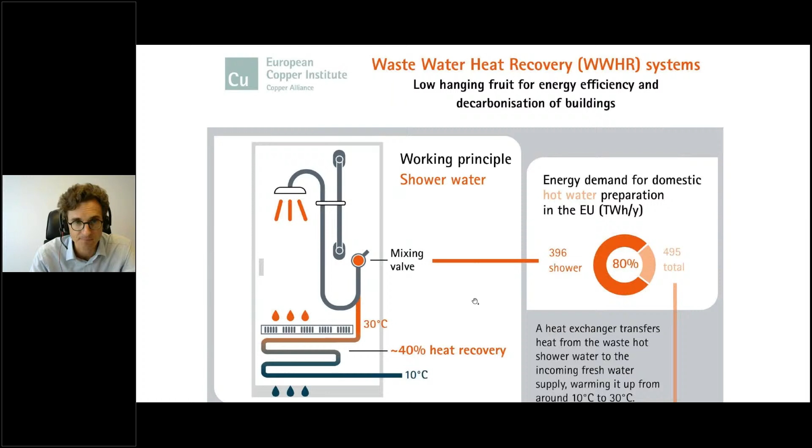My second example is related to electrical installations. When you transport electricity, there are losses that can be minimized by choosing the optimal section of the conductor, but also by optimizing the installation location, load management, control and monitoring. Today, 2% of the electricity generated in the EU is lost within in-building electrical installations. 2%, that's quite a lot. And it's estimated these losses could be divided by 2 with optimal dimensioning of the electrical installation.

Again, improving the efficiency requires modeling it. These two examples illustrate our need for building performance assessment methods that are sufficiently close to reality, holistic, transparent, applied consistently, and based on robust data. And now I'm looking forward to our discussion on this topic. Thank you.

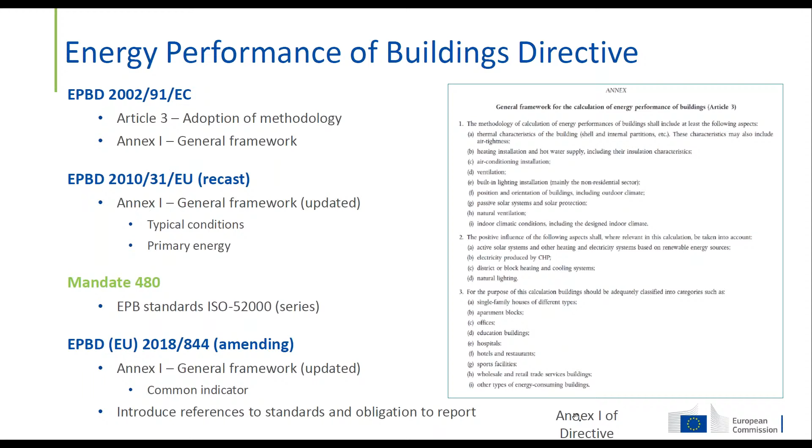In 2010, when we revised the EPBD, we expanded this general framework a little bit. We introduced further references to the fact that we had to account for typical conditions, because, as most of you will know, we design a building according to the design conditions, but we also need to make absolutely sure that the building will be able to correspond to multiple scenarios.

And also in 2010, we started the mandate M/480, which was a mandate to ISO to start developing a set of standards on the energy performance calculation of buildings. This set of standards was designed and made on purpose to support the application of the EPBD. In 2018, we further amended the EPBD.

There wasn't very much introduced in this case. We basically introduced a common indicator, which is in primary energy kilowatt hours per square meter, and we also introduced a number of references to the standards and an obligation for member states to report. So we speak with member states with a common language.

In 2021, with the current proposal for a recast, these are the elements that we're discussing today with the member states and parliament. We also propose a number of changes on the methodology. You can see now that this is in the image, some snapshots of Annex 1.

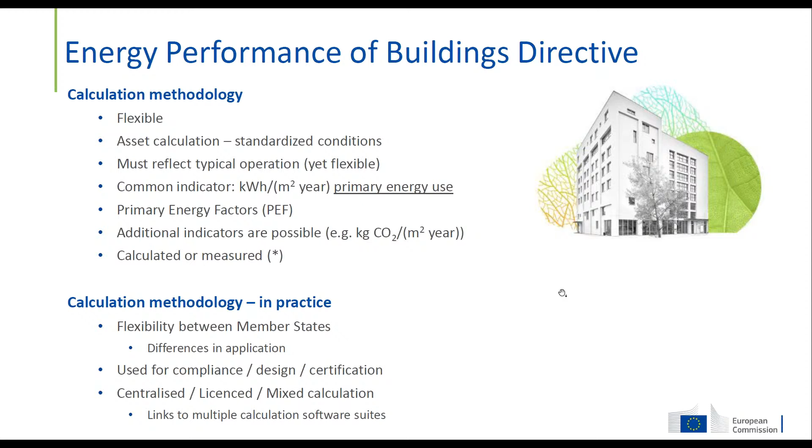And this is already my last one. The last element that I wanted to highlight is—I mentioned it briefly before—in 2010 with the EPBD, we also issued a mandate for the development of standards for the calculation of energy performance of buildings. A number of elements were very clear in the development of these standards. First of all, we needed to have this flexibility that I mentioned certain times.

In order to do that, the standards have been developed in a modular approach. You can adopt all of the standards, or part of them—you can pick and choose whatever is useful for you. In terms of obligations, member states are not obliged to use the standards; there is no obligation to adopt them.

However, there is an obligation to report the calculation methodologies in member states using the language of those standards, using the templates developed on those standards. This allows us to have a common understanding of what the different methodologies can do, and also allows us to compare the different calculation methodologies.

There are a number of standards that are directly identified in the EPBD, for example, all the overarching standards, but also the indoor requirements and the primary energy factors standards. In addition to setting up this set of standards, we've also supported the development of a support service.

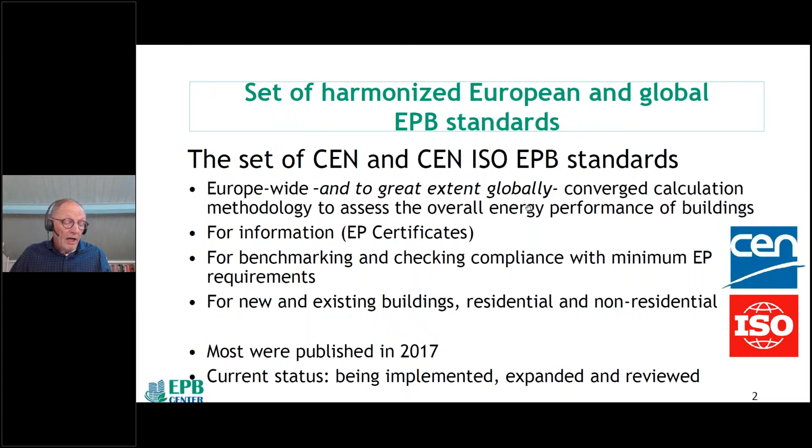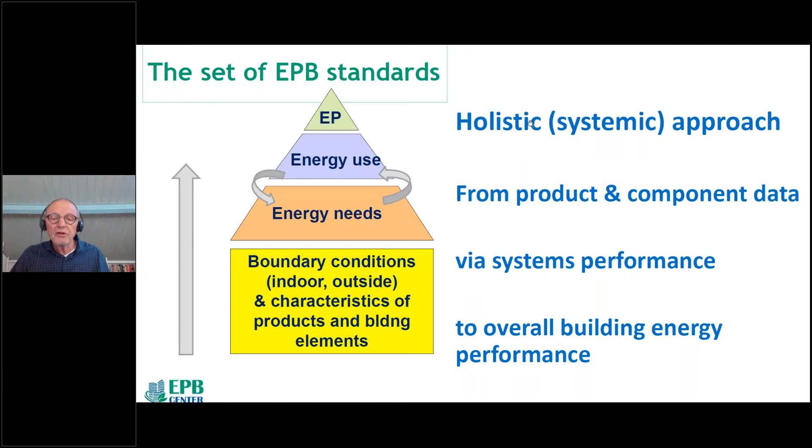So the set follows a holistic, systemic approach, starting from the product and component data via the energy needs and the system performance to the overall building energy performance.

And as also already mentioned by Pau, the modular approach has been adopted, which means that you have a subdivision into overarching standards, standards on heating and cooling system, domestic hot water, ventilation, lighting, building automation and control, and on building and building components. Here you see the numbers of sub-modules in these sets, which indeed makes it quite flexible to adopt the whole set or to start with a number of the standards, and where needed to have hopefully temporarily national standards to fill in some gaps if there are.

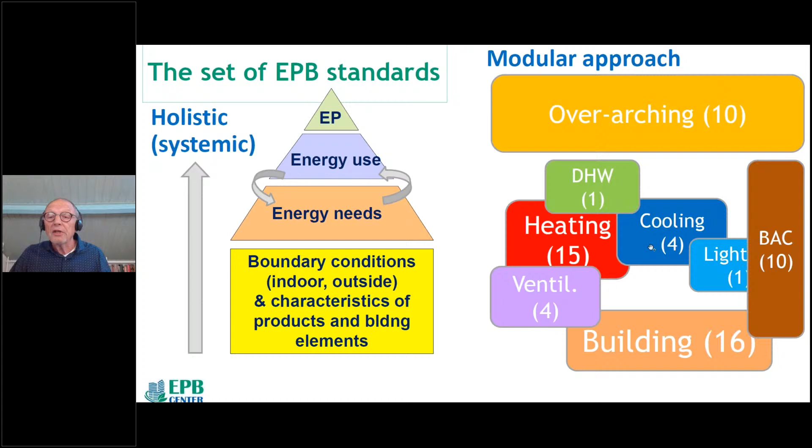So why is it important to have and to use this set? If you look at the energy performance calculation methodology, it's not only the calculation method itself, it also concerns common definitions. So for instance, the definition of primary energy, definition and specification of the floor area. If you speak about square meters, kilowatt hours per square meter, it's very vital that you know which square meters you are talking about. And also the assumed outdoor and indoor conditions, so the climatic data, of course, and the temperature settings, ventilation requirements, lighting requirements, depending on the function of the building.

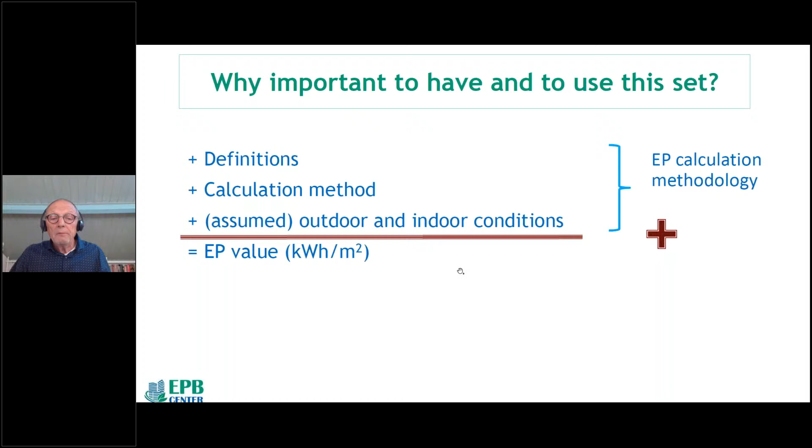And that altogether gives you an energy performance value in kilowatt hours per square meter, if we look at the primary energy. But then the question is, what does it mean? It doesn't mean actually anything if you have just a value and you have no benchmarks to compare with. If you have a meter, you have to know what is the 0, what is the 100 centimeters, and then you have a benchmark. So you need benchmarks, reference values to give a meaning to the energy performance value, and only then you have a metric.

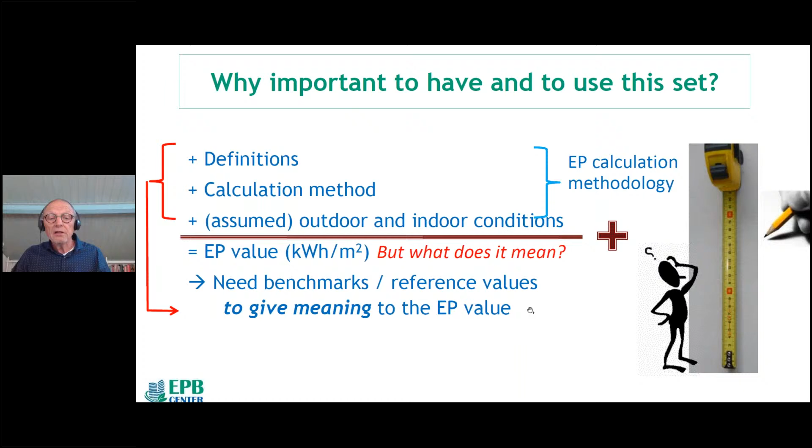So the set of EPB standards is a common energy performance assessment methodology consisting of definitions, actual calculation methods, sets of assumed outdoor and indoor conditions, and energy performance indicators. And if one of these is different, you have a different methodology, you have different output and a different meaning.

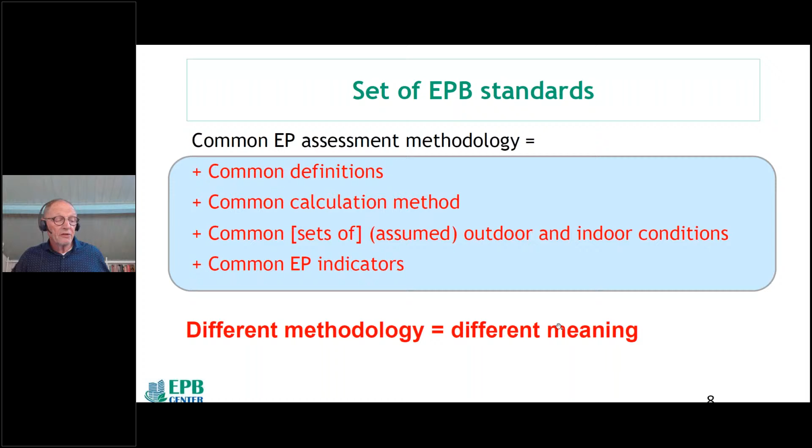Is it a one-size-fits-all approach? No, as already stressed, you need to be flexible to allow national choices, for instance for climatic conditions and primary energy factor values, which reflect national infrastructure. But if you want a common metric and comparison between countries, you should aim for the possibility to converge to a common reference.

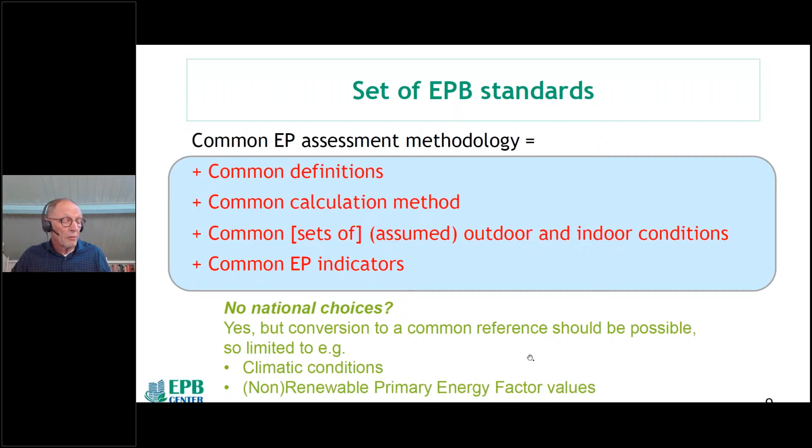The time today is very short, there's a lot more to say, but luckily we have the EPB Center website where you can find a lot of information, and you can also ask questions there. We have a large amount of information on the set of standards, individual standards, frequently asked questions, webinar recordings, short videos, recently updated tools. Very new is a number of detailed case studies on individual standards and on the overall energy performance calculation, and this is still growing.

I could also introduce a number of key EPB standards, but there's no time to go into depth on this slide. So what I will do is upload this slide with dynamic links from each of these blocks to more information on all of these key standards, and put it on the website for you to look at.

Just one thing I want to highlight is that you see in many places EN ISO 52000 appearing, so 52000 to 52120 and more. These are the EN ISO 52000 family of standards. When they are upgraded from CEN standards to the global level, they become part of this family of standards.

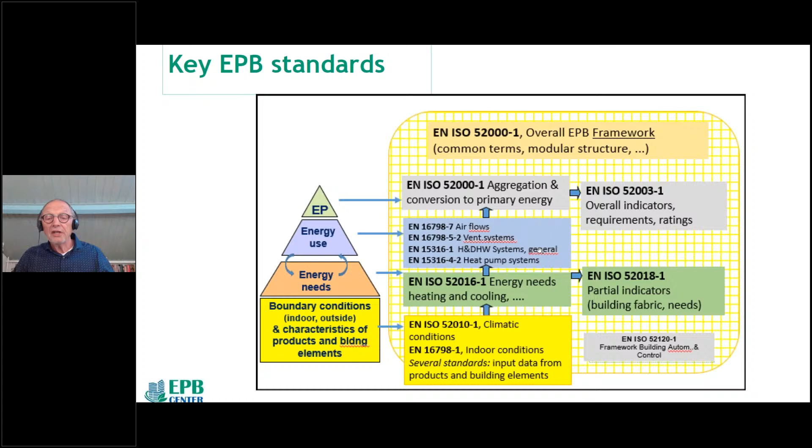Now something about the future development of the set of EPB standards. As we speak, there is a systematic review going on of all the EPB standards that were published five years ago, in both CEN and ISO.

For this unique occasion, a team of CEN and ISO experts prepared and distributed an informal guidance document which contains extensive background information, but also food for thought and questions for all the relevant mirror committees of the national CEN and ISO member bodies, to provide feedback on individual standards and on the whole set. And of course, this information and these questions are also of interest to other stakeholders.

This information can also be downloaded from the EPB Center website. And if you as a stakeholder have interest in filling in the questions, you can submit the response to the EPB Center via the website, or directly to experts if you have their email addresses.

If you ask what I see as a priority for the future, maybe a little teasing what Pau said, I would like to see less options for national choice to establish increased convergence. And also digitalization of the standards. There's an ISO Smart program aiming for more digitized standards in the future. The program is not very clear yet, so we hope to have a fruitful discussion and pilot projects in this program to help the digitalization of standards.

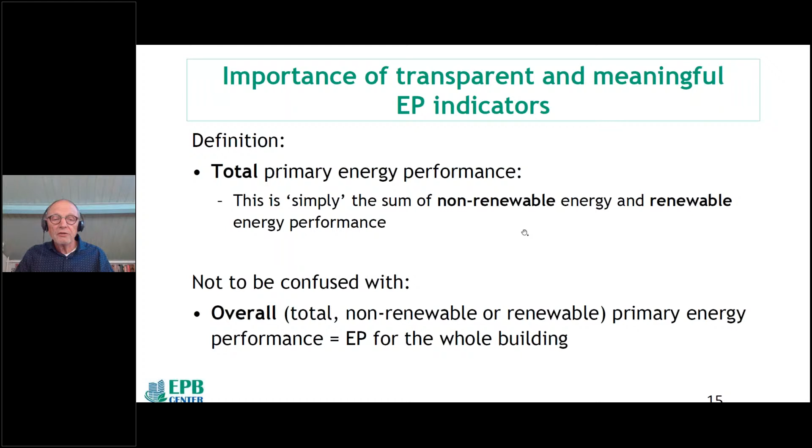Otherwise we are not clear, and we're speaking about different things.

Another important aspect for calculations and definitions, particularly relevant for renewable energy produced and used on site like PV panels, is the concept of net annual energy performance, in which the energy balance is averaged over a longer period, in this case a year. So the need for electricity from the grid during the evening or wintertime is then compensated in the calculation by the surplus of PV during the day or during summer.

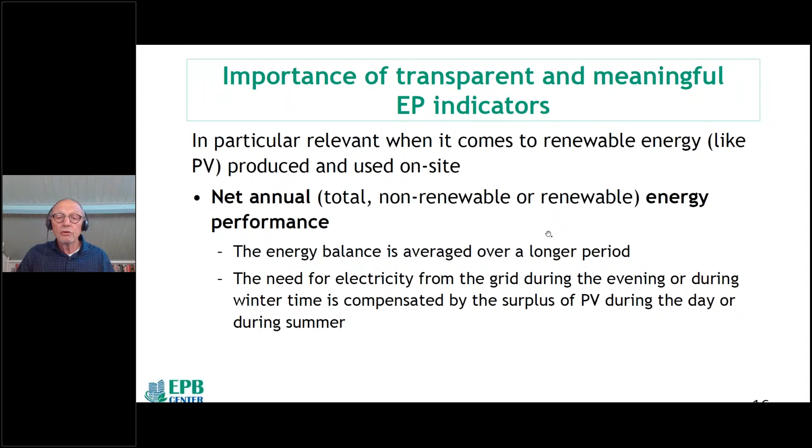This might have been a fair approach for nearly zero energy buildings, but when we want to move toward truly zero emission buildings, this is no longer the case.

Summer or day surplus does not cover the winter or night shortage. It's only compensated in the calculation, which disguises that non-renewable energy is actually being used. So if this is the route towards zero emission buildings, it's a fake zero emission building. It's not covering, but actually covering up the use of non-renewable energy. It also hinders the optimization of the energy balance between the building and the grid, for instance hindering the appreciation of the smart use of equipment and batteries.

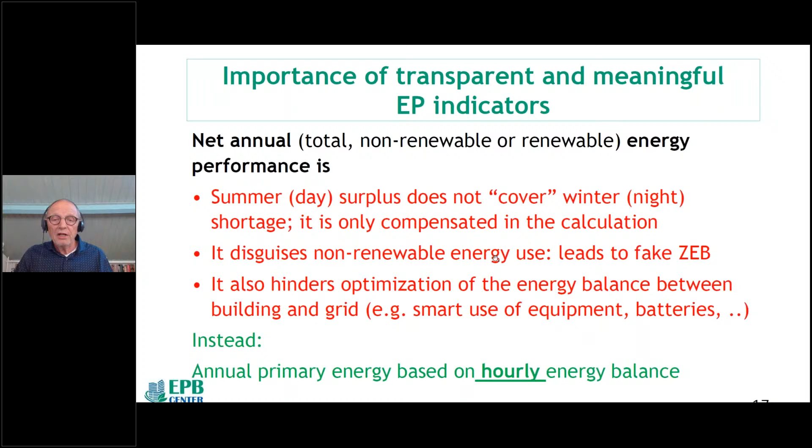Instead, we should aim for annual primary energy based on an hourly energy balance calculation. I'm happy to see this is also the route followed in the EPBD proposal by the European Commission. I can show many illustrations of this in the case studies on the EPB Center website, where you'll find those. There's an absolute need for hourly calculation steps.

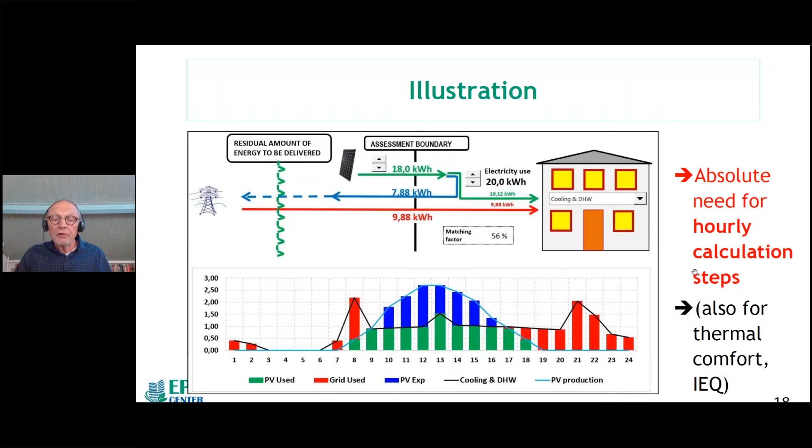Another aspect is the question of what indicator is needed to more or less assure a highly energy efficient building, to have a threshold that ensures the building itself is highly energy efficient. It's not the total primary energy, because this includes renewable energy used to achieve a high efficiency building. If you have a threshold on the total primary energy of the building, then you punish people who have a solar boiler installed.

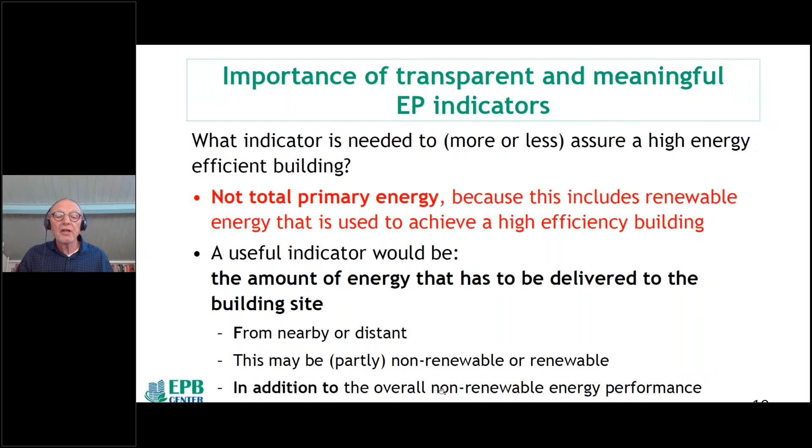So a useful indicator would be the amount of energy that has to be delivered to the building site from nearby or distant sources, which at the moment may still be partly non-renewable or fully renewable. To be clear, this is not intended as a replacement, but as an addition to the overall non-renewable energy performance. In terms of the EN ISO 52000 assessment boundaries, where you have on-site, nearby and distant, we normally say the renewable energy produced on site is seen as energy delivered to the site, to have clear recognition of this.

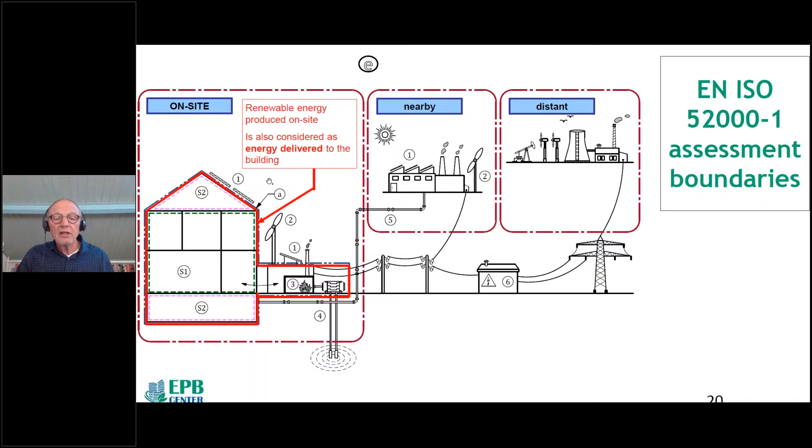But for the purpose of finding the residual energy still required and assessing the energy efficiency of the building itself, we should draw the boundary here, where renewable energy produced on site is included in the energy balance. So it's not punished, it's seen as part of the energy measures taken on site. The positive by-effect is that there's no need for difficult discussions on where and how to assess the amount of renewable energy produced and used on site.

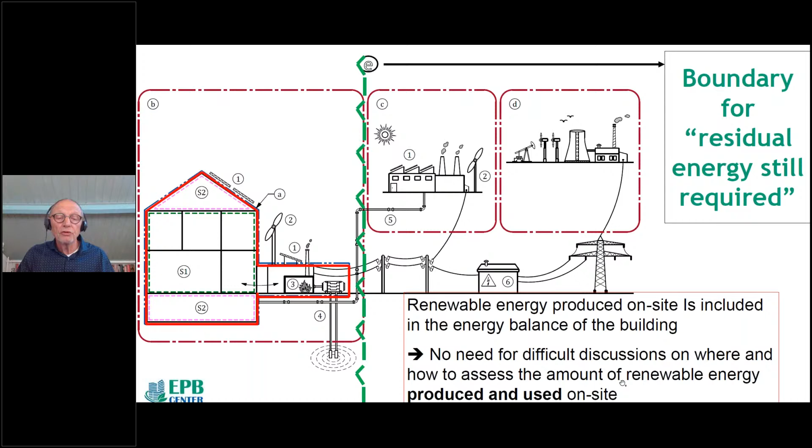I'm not going into the details, but I'm sure several of you are aware of this problem with the definition. In another diagram, the residual amount of energy to be delivered to the building actually looks quite similar to what you would find on the meter of your building site. All the renewable energy produced and used on site is then implicitly taken into account, so you do not punish the solar boiler on site.

On the other hand, what has to be delivered from nearby or from the grid could include renewable energy. By drawing the boundary here for this residual amount of energy to be delivered to the building, you don't take for granted that this includes a requirement to have renewable energy from nearby or from the grid, because you cannot assume that's unlimitedly and freely available for all.

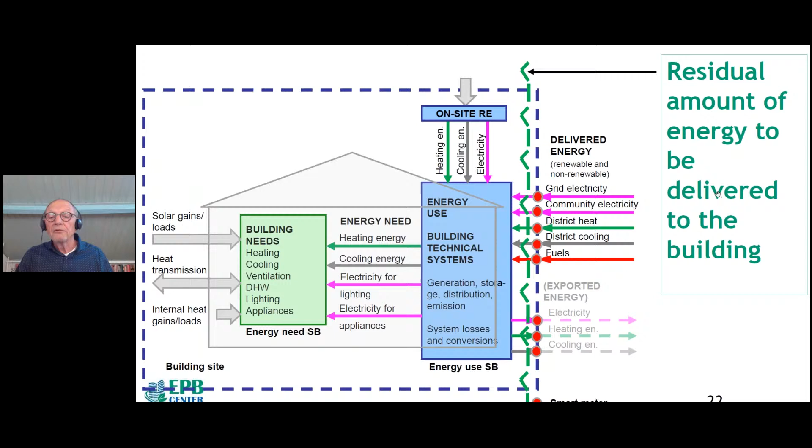That brings you to these successive assessment steps. On the building site, you have the performance of the building envelope as a metric, and the performance of the technical building systems. We know from the EPBD proposal, we go for zero carbon from fossil energy into the building. You have the performance regarding thermal comfort and indoor environment quality, and then this residual energy still to be delivered to the building site, which gives the indication of building energy efficiency.

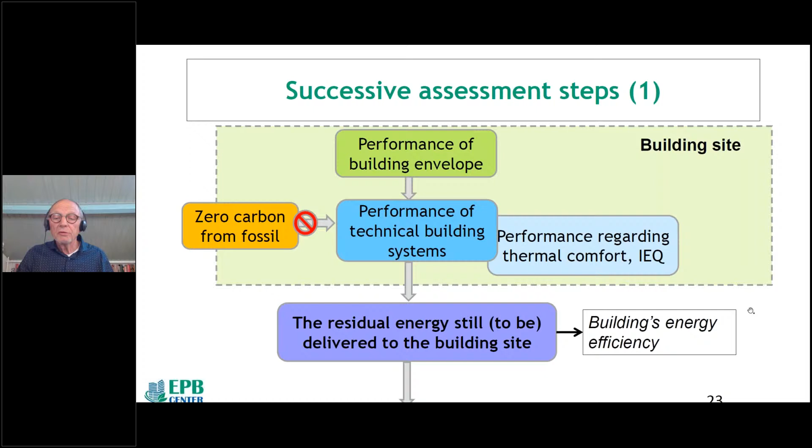The next question is how to cover this residual energy still to be delivered to the building site, which is by nearby and distant sources. At this moment, these sources are not 100% renewable in most cases. So this calls for a national policy for trajectories decreasing the non-renewable share in the nearby, so from district level and from the grid, to in a couple of years' time come to really zero emission buildings.

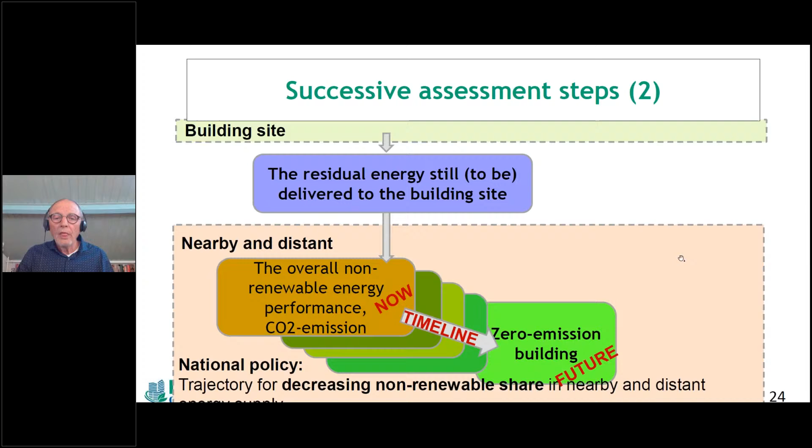And that brings me to the conclusions, but for the sake of time, I'll skip them because it's just repeating and briefly summarizing what I said before.

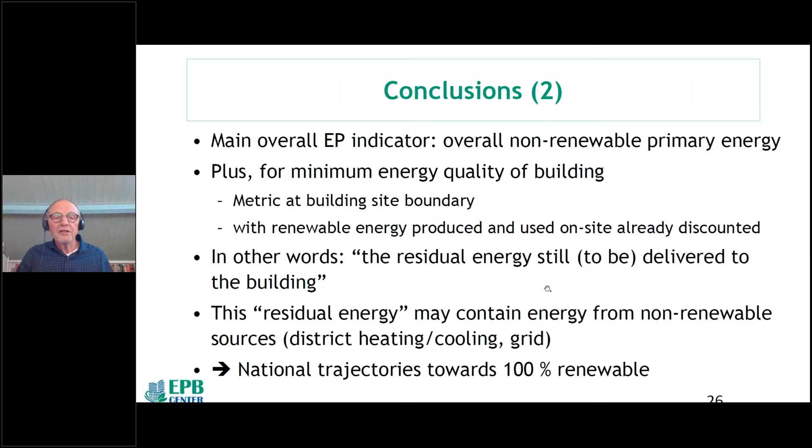Just pointing again to the information you can find at the EPB Center website, where you can also find this guidance document for feedback on the set of EPB standards, and about this metric for the efficiency at the boundary of the building site.

You can find more information and more details in the REHVA journal paper from the most recent REHVA journal, from myself and Jarek Kurnitski.

And if you have any questions, you can find the contact button at the EPB Center website, and we'll try to answer your questions. Thank you very much for your attention.

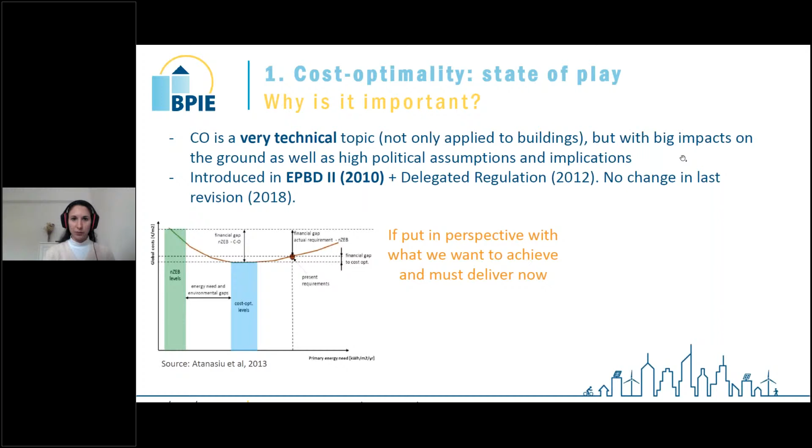Now, if we put that into perspective with what we want to achieve now and what we must deliver in the future, in terms of our EU energy and climate goals—that means the 2030 climate target, and for the building sector, a zero-emission building stock by 2050, as well as transforming existing buildings into ZEBs—we might see that indeed we have a gap between what we have now and our future goals.

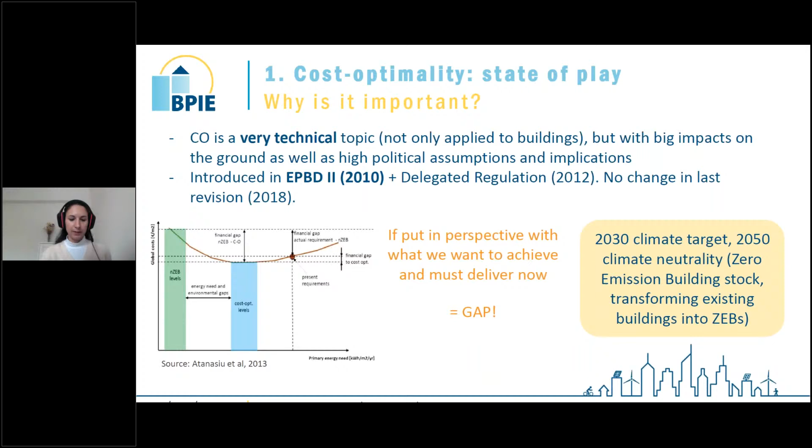So I think this is a strong argument in favor of opening the discussions on the EPBD methodological framework on how to set energy performance requirements, and also question whether the framework that we have at the moment is still fit for purpose, considering where we need to go and where we are right now.

So in terms of the cost optimality limitations that we have at the moment, I think the big message is the misalignment with our climate targets for 2030 and 2050. If we look more into the details, which limitations exactly can we talk about? These are put as questions because it's more about raising questions and questioning what we have at the moment rather than giving you all the solutions and all the answers.